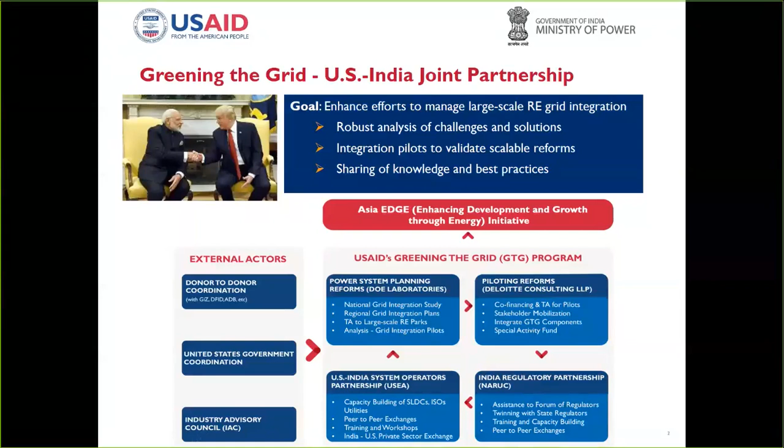In the last three years, the program has made some progress towards these issues. The program is piloting six innovation solutions and technologies, one of them being the flexible operation of coal-based power plants, and today we are going to discuss more on the findings of that particular pilot.

In addition, we also have pilots on battery energy storage systems, on automatic generation control on renewable energy plants as well as on hydro facilities. There's a pilot on market reforms, and another pilot on dynamic reactive power compensation. So there are around six pilots which are ongoing under the program.

There are also two white papers currently under development. Once completed, another one which focuses on electric vehicles is still to be implemented.

The program has already leveraged $12.44 million in terms of investments from partners such as NTPC or Power Grid Corporation, and so on and so forth. We have around 19 members on the Industry Advisory Council.

The program is also providing regulatory support to states, and 14 states have been supported thus far in terms of coming up with or drafting their forecasting and scheduling regulations, as well as DSM regulations. The program is also working with or supporting CERC in its market design.

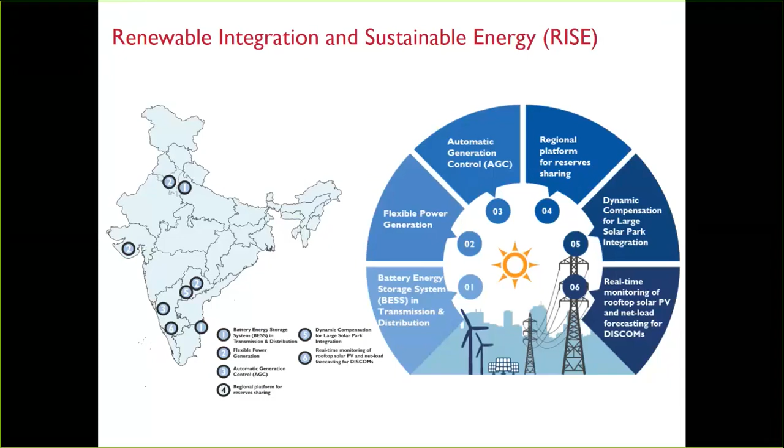And there is another pilot that we intend to look at, on real-time monitoring of rooftop solar. That's essentially distributed energy rooftop forecasting, still being discussed at the pilot stage, but the rest of the 5 pilots are in a well advanced stage of deployment. Now, I will quickly take you through what we are looking at in the coal-based flexible power generation with NTPC and GSECL.

We started this pilot way back in early 2017, and it's almost 3 years now.

If you look at this slide, there have been 4 stages, and we are in the 3rd stage of pilot implementation. We started initially with the techno-economic assessment, comprising technical due diligence and detailed feasibility assessment of 2 units of NTPC: one 200 megawatt unit at Ramagundam in Telangana, and a 500 megawatt unit at Jhajjar plant in Haryana.

The objective of carrying out the technical due diligence studies was to assess the existing state of operations of these units, how they have run over the past 10 years, what design components have been incorporated, what changes have been made to the OEM design, and how it will help in charting out the flexible roadmap for these units and similar 200 and 500 megawatt units in the country, especially for these two utilities.

That's where we had international support from our technical consultants, Intertek, who bring a lot of expertise based on their wide experience conducting similar studies worldwide. With their help, we were able to assess the damage cost modeling studies, and feasibility reports were presented to NTPC as well as GSECL. Similarly for GSECL, the generation utility in Gujarat, we conducted a similar study for 200 and 500 megawatt units at their Ukai thermal power station.

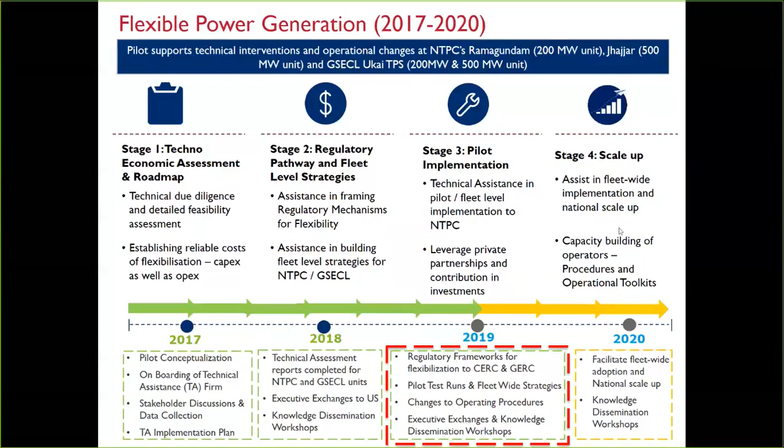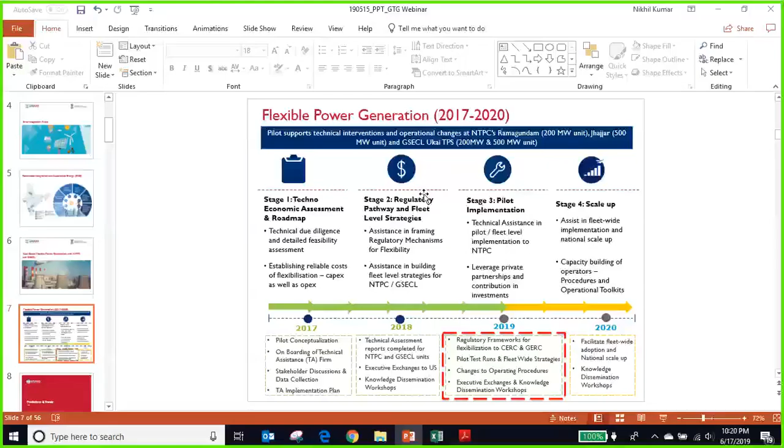Thank you, Anuj, Ripu, and Monali, and thank you to all the attendees for joining us. It's quite humbling to see what a small part we're playing in the big project. Let me quickly share my screen and we will get started. Anuj, if you could confirm that you can see my screen. Yes, I can. Okay.

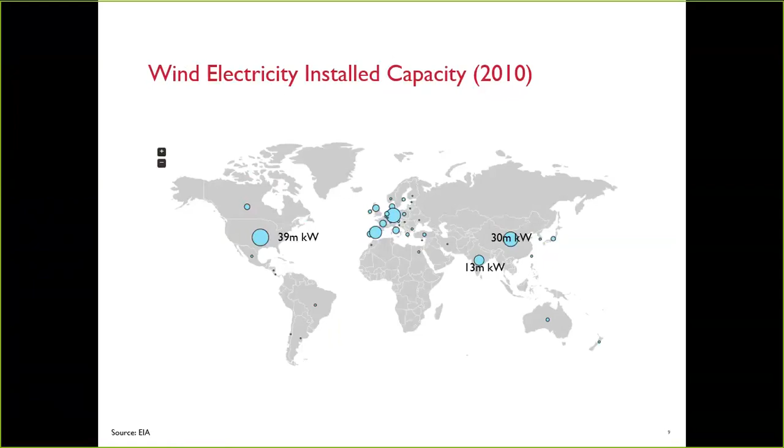If you're attending this webinar, you already know the trends. In 2010, just 9 years ago, we had some amount of wind capacity, predominantly in Europe, China, US, and India. But fast forward 6 years, and you can see what a big change in wind capacity there has been throughout the world.

Today we have 57 countries out of some 90-some with 100% renewable targets. Renewables dominate new capacity additions. In fact, in 2017, we had more PV capacity added than coal, gas, and nuclear combined worldwide. A bulk of that addition comes not in Europe or the US, but primarily in China and India.

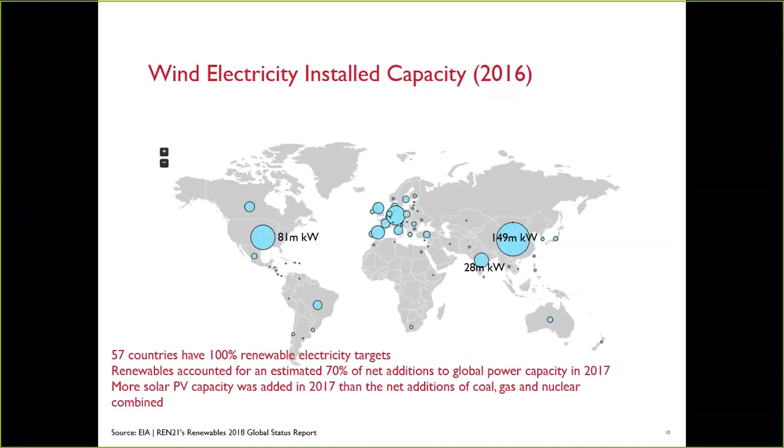In India, we went from 13 million kilowatts of wind capacity to 28 million kilowatts just in 6 years, and the targets are quite ambitious going forward.

Here are some of the predictions that Intertek has worked on with various other partners. We did studies with GE, as well as the PJM system operator, the Department of Energy, and the NREL lab in the US.

Typically what happens when you add renewables to the grid is that most of the fossil fleet, the conventional fleet, has to change its operating profile. Some of the scenarios and analysis we did in the past suggested that operating costs for conventional fossil plants would increase by 2 to 5% on average.

As markets have evolved, or if you're in a regulatory world, a 2 to 5% increase in operating costs can have a big impact on your revenues. So we think that's a big deal.

Also, if you have a coal-heavy or gas-heavy generating profile, as you add more renewables, they will displace the units on the margin or even units that are traditionally base-loaded. If you looked at the Western grid in the US, which is gas-dominated, as you added 4 megawatt hours of renewable generation, you displace 3 megawatt hours of gas from the grid. So not only do you have increasing O&M costs of 2 to 5%, you also have reduced revenue from not being able to generate.

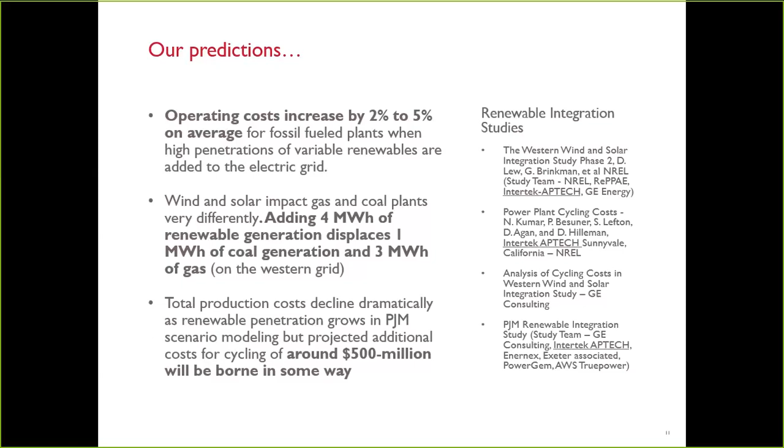As Anuj mentioned, one of the outputs of our analysis for the GTG program is to assess how capable the coal units in India, both at GSECL and NTPC, are to perform cyclic operation, as well as what the impact is in terms of financial, O&M, and reliability of the unit. If you cycle the unit today, what happens tomorrow as you have to spend more money on the units?

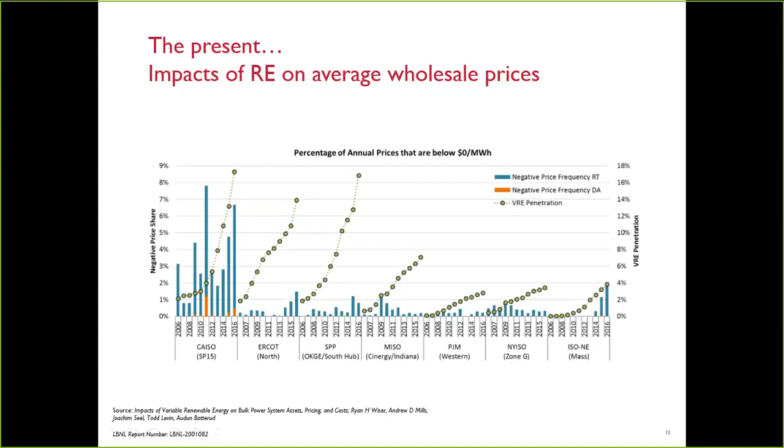One thing to point out is that it depends on which market you're in. If you're in California ISO, you can see as wind penetration goes up, the negative price share also goes up. But on the flip side, if you're in PJM or MISO, that frequency isn't as dominant. So there are certain regions affected more than others - I don't want to say that just because you add renewables, that would always be the result.

I can skip this since it's a US scenario, but something to point out is that if you look at the US, the capacity factor of coal units has gone from 60-61% in 2013-14 down to 54% in 2018, with gas being the dominant generation.

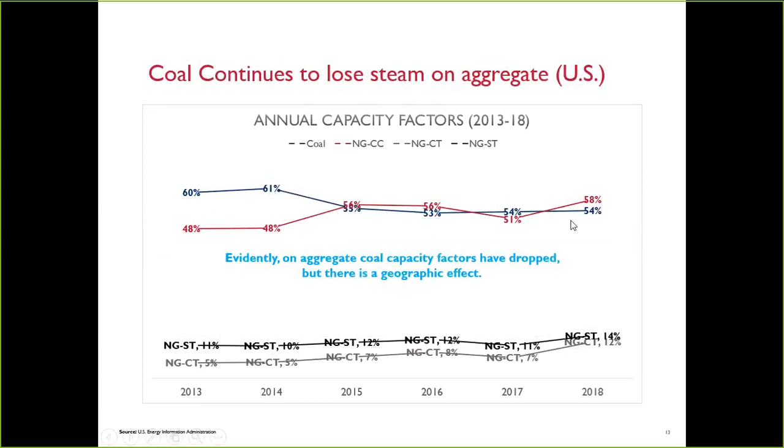Very quickly, we wanted to see how wind and solar impact conventional fleets. We looked at 3 different regions in the US: California, Texas, and Iowa. California is a solar-heavy state - they have wind, but solar is the dominant renewable generation technology, along with natural gas.

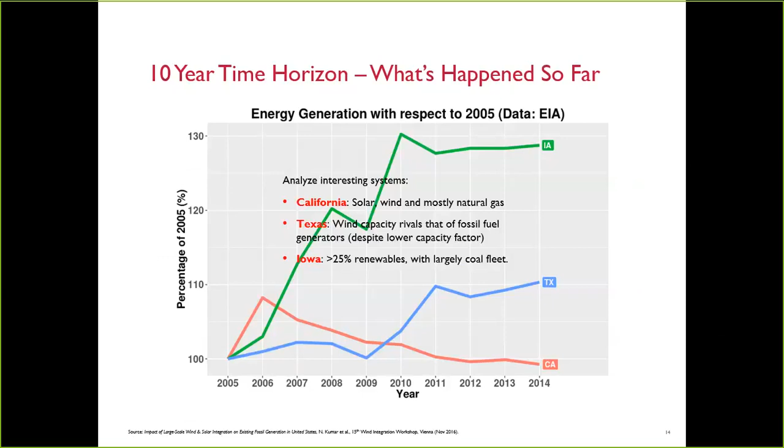Texas is the largest producer of wind in the US, and Iowa has over 25% renewables with a largely coal fleet, so Iowa should represent what is likely to happen in India. When you take a look at these 3 regions - I can skip this - here's what happens on the fossil fleet.

On the left-hand side, you're seeing the California fossil generation. What we have is offline hours, load following hours, base load operation, and over MCR—so if you're using duct firing on a combined cycle unit or something of that sort.

If you look at California, between 2005 and 2015 there was a significant increase in units staying offline. Also, these units operated at full load. Because it's a solar-heavy state, the requirement on the conventional fleet is less about low load operation and more about quick start—as the sun comes up, you want to shut down units quickly, and when the sun goes down, you want to turn them on quickly. You can see that's exactly what's happened in California.

If you look at the rightmost chart, Texas, which has a lot of wind, because you've got so much wind you have to turn off a lot of units—you can see an increase in offline hours. But other than that, wind has a little bit less of an impact in terms of cyclic on-off operation.

But if you look at Iowa, which is a coal-heavy state with a lot of wind, they have replaced the coal fleet, so you have a lot more offline hours on the fossil fleet. Also, in the baseload section, the number of hours on baseload have reduced. So not only are you not running a lot, you're also running at low loads, because you have a coal fleet which is not that flexible.

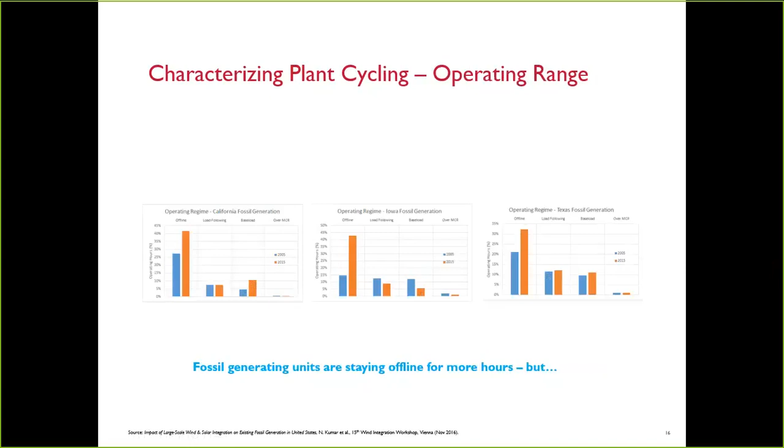On the left side is the classic California duck curve. As the solar comes on, you can see the ramping requirements on the fossil fleet. In Texas, you can see very little change over time. This is 24 hours on the x-axis and the amount of energy on the y-axis.

But in Iowa, the red line is 2012, the blue line is 2015. Throughout the 24 hours, the generation from the fossil fleet has reduced—wind is displacing the coal units.

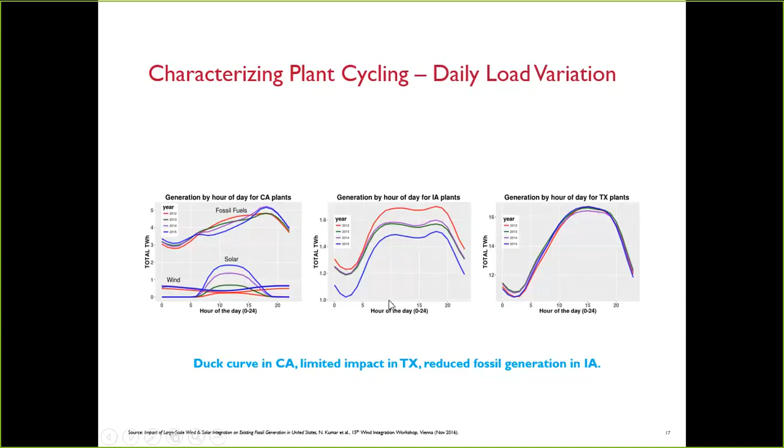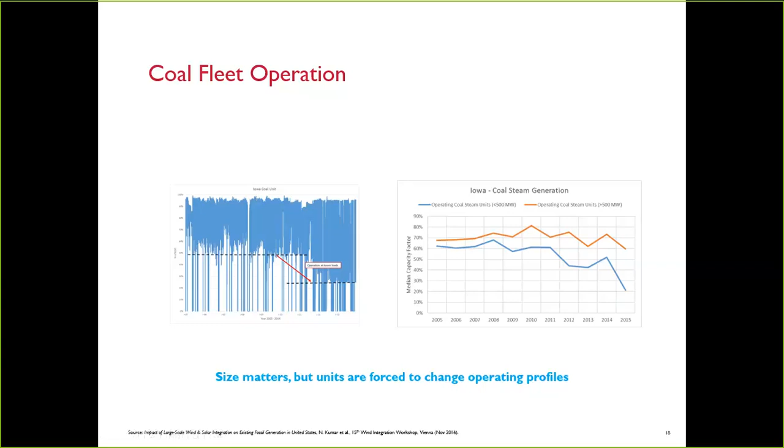When you look at coal units, there's a different scenario for a small versus a large coal unit. For a large coal unit, the orange line shows a slight reduction in capacity factor from 2005 through 2015. But for a smaller, less efficient coal unit, the impact is far more dramatic—going from 60% capacity factor down to 20%. So size matters for coal units in a renewable world.

Part of what Anuj was mentioning, and I'm hoping Mr. Sinha will add comments later, is that there are opportunities in this type of operation. If we have a regulatory process of cost recovery and you don't have flexible generation from the coal units, then the incentives are moot. You need system operators to be able to get flexibility from the grid.

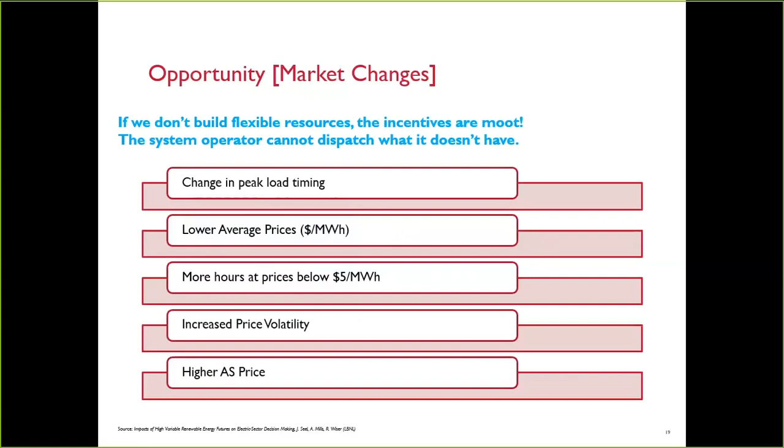Obviously you have price volatility and higher ancillary service prices. So if you're not flexible, you can't take advantage of some of these incentives that the market or the regulatory process is going to put in place. That's something you want to be able to do.

So here's the problem statement: if you're looking at flexibility, what is important? One is startup time. Another is how low can you operate the unit. Are there any local emissions requirements—you have to meet emissions compliance. And then what are the ramp rates when you're running at low load going to full load?

What does this impact? Number one is safety. We've had concerns pretty much worldwide that as you operate units in cyclic mode, there are catastrophic failures of equipment that you did not anticipate, because you're used to running base loads. So safety of personnel is paramount.

The equipment life is going to change, reliability is going to change, costs in terms of maintaining equipment are going to change, and the amount of money you can make in the market or a regulatory world is going to change. How do we address these impacts? One, you make operational adjustments. Two, you invest capital in the units. And three, you determine which of these factors is most valuable.

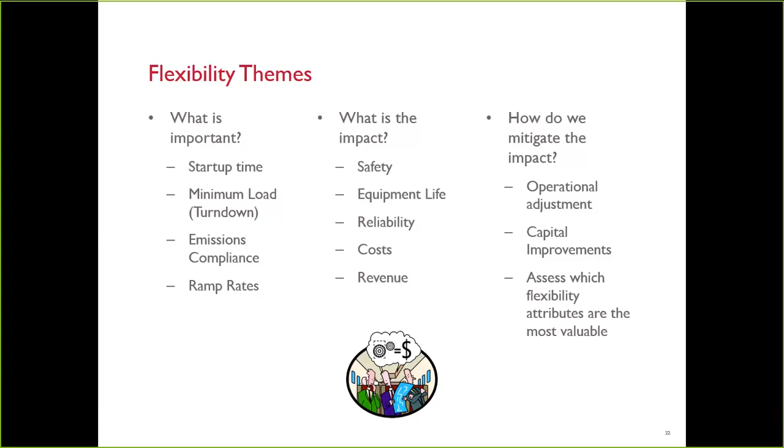Is faster startup time more valuable for you, or is minimum load what is valuable for you? You need to understand what is important for your grid strategy versus making your unit the ultimate flexible machine. That's not the point of doing a flexibility analysis.

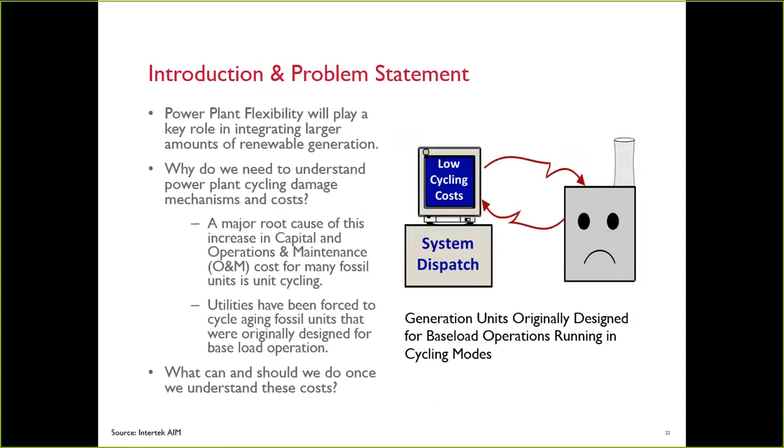In this case, the power plant has a sad face, not because it's being cycled, but because the dispatcher or the regulatory process is not accounting for the damage the unit is undergoing. If it can get compensated for the flexible operation, then maybe the plant's going to be relatively happy.

So the first statement I'd like to make is that almost any unit can be cycled. In fact, it can be cycled with minimal intervention. You can take an existing unit, a supercritical unit if you'd like, and change its operating mode. Now what that will do is you have to account for the increased wear and tear damage, both in terms of long-term penalties. As you cycle a unit over time, you will have more damage on the equipment and reduced reliability. But more in the short-term, you have heat rate issues and increased O&M and training requirements. So as far as you account for those aspects, you can cycle any unit.

There's also some training and education required around what kind of component damage exists on the unit. You need to understand, one, what is the current state of equipment damage on the unit. Just because you've run base load for several years doesn't mean you have no damage. You've actually consumed a fair amount of creep life on your superheater, on your reheater, some of the high energy piping, even your turbine. So there is some amount of damage already accumulated.

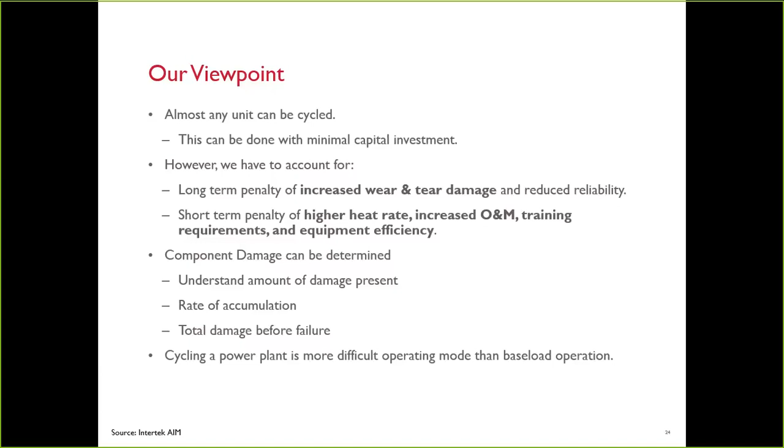The next thing you want to understand is what is the rate of accumulation. If you take a relatively new unit that has been cycled 50 or 60 times a year, that is very different from a unit that is run base load. So rate of accumulation is important. And then total damage prior to failure - how much total damage do you have on the unit? All of these things have to be taken into account, but again, all units can be cycled.

This is a very general definition of cycling. I know we've been using the words flexible generation and cycling for a while - I'm on slide 25. If you define cycling, we would define it both in terms of load following, mild load follows, all the way down to significant low load operations. So 55% low load, that is also cycling. And if you're just doing AGC of 5 or 10% change in operation from full load down to 85% load, that is also cycling.

And then you have the hot, warm, and cold start, which a lot of us are very familiar with. These offline hours are, for example - if you have a smaller coal unit, sometimes those definitions might be different; if you have a gas unit, those definitions might be different. But those are just examples. In general, the bigger the change in temperature on your equipment, the more the damage on the equipment. So cold starts are far more damaging than warm starts, which are more damaging than hot starts. And my colleague Doug Hilleman always says the trick to reducing damage is to keep hot things hot.

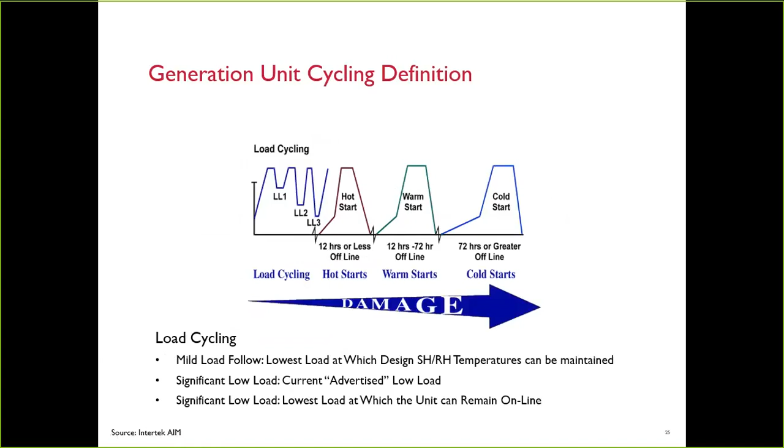So what is important is that if you're doing load following, the amount of damage you put on the unit is significantly lower, in fact magnitudes lower, than if you were starting and stopping the unit. To give you an example, you can probably do 50 or 100 extremely low load operations - not 55%, but 30% or 40%, depending on your coal quality and your burners and things like that. But units in the US can go down to 25% or even 10% low load, and that is still less damaging than a single hot start. So load following is the least damaging, cold starts being the most damaging.

If you're pressing baseload units into cyclic operation, these are some things to keep in mind. Number one is cycle chemistry. For the most part, when we went to India, there was on-site cycle chemistry personnel. They had good equipment, or at least had plans for good equipment. Having said that, in the multiple years the units had been running, some of the equipment was missing. So hopefully in the next few years, if you're performing flexible generation, you need a good chemistry program and good monitoring program to go with that.

If you have mixed metallurgy on the units, that is going to be a problem. So if you have copper in your condenser or your feed water heaters, and you're performing cyclic operation, that will be a problem in the future. So there are plans to get rid of that. Cycle chemistry is a critical component if you're performing cyclic operation.

The rest of it is mostly associated with thermal fatigue. You have thermally induced cyclic stresses. Again, if you do a cold start, that's the most amount of stress. If you're doing a load follow, less stress. There's extent of fatigue damage, and then nature and frequency of the transient. So you can do hundreds of load follows - that's one type of cycling - or you can do 10 cold starts, which is a whole different damage mechanism.

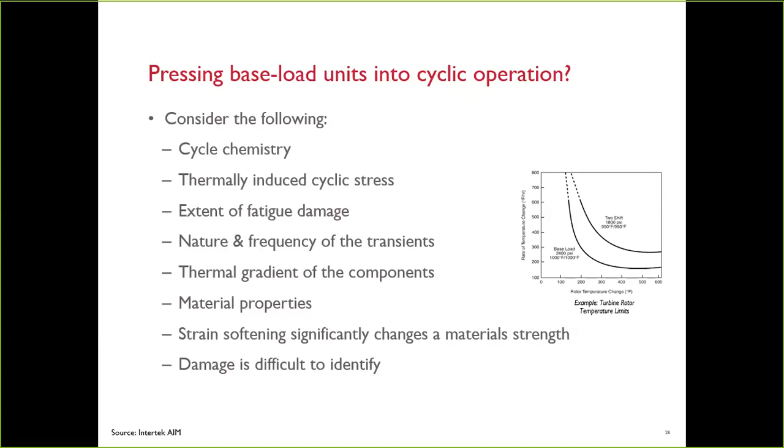So think about it: load following is actually lots of fast changes but small delta T. That is less damaging than if you're doing a cold start, which is a large delta T. But you can still do a small rate of change, and that can actually cause a lot more damage.

Just quickly, creep - creep is time dependent. If you're running a unit in base load operation, you've consumed creep life. Fatigue is just that - you're changing load constantly, on and off, or load following. And then there's a concept of creep fatigue interaction.

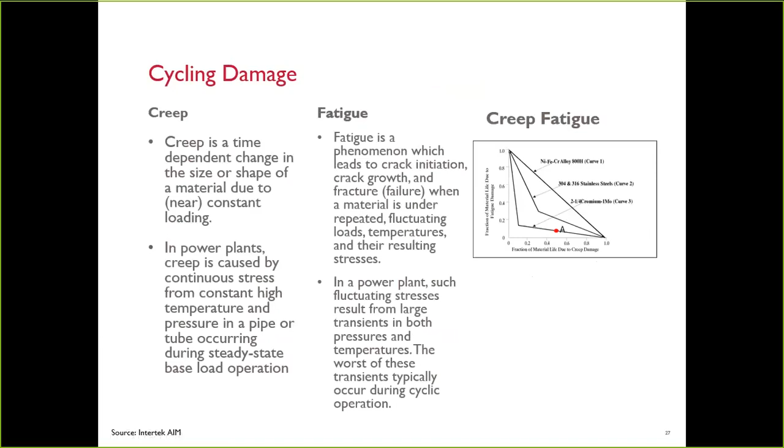So if you have a unit - I can show you this ASME curve on the right-hand side - what this curve says is that you have a nonlinear impact. If you have a much older unit, a 15-year or 20-year-old coal unit, and you add fatigue cycles to that, the rate of life reduction accelerates. That's basically what creep fatigue interaction would tell you.

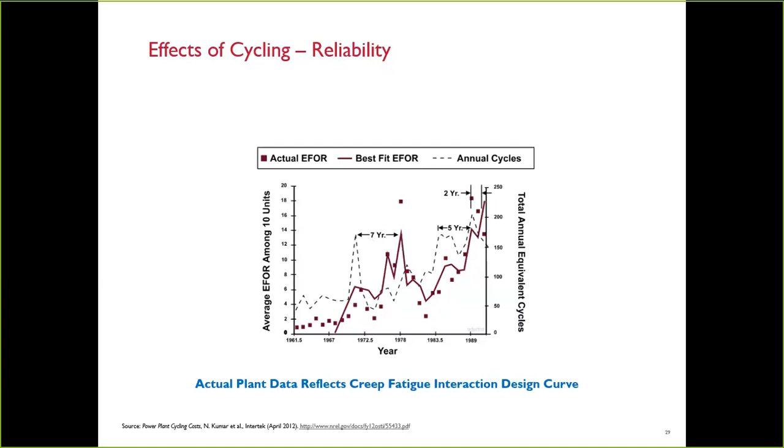Also, one thing to keep in mind is that there is always a time lag. Just because you cycle your units today or tomorrow doesn't mean that you'll have a failure next week. You can have it, there's a likelihood, but it's unlikely. Generally, there's a lot of time lag between increased cycling and then damage. So that's a point to make.

Effects of cycling on efficiency. So we all understand if you run a unit at low load, you're less efficient. At the same time, if you cycle a unit excessively, there's also a long-term impact on heat rates. So typically we say that you can attribute 1 to 5% loss in efficiency with cyclic operation. Now you can get all of this back if you do a good boiler overhaul or a turbine overhaul, and you can get some of this heat rate loss over time.

But if you're not on a base load unit, some of the units that we visited in India, there was quite a lot of time between turbine overhauls. So you will continuously lose efficiency over time until you perform one of these overhauls.

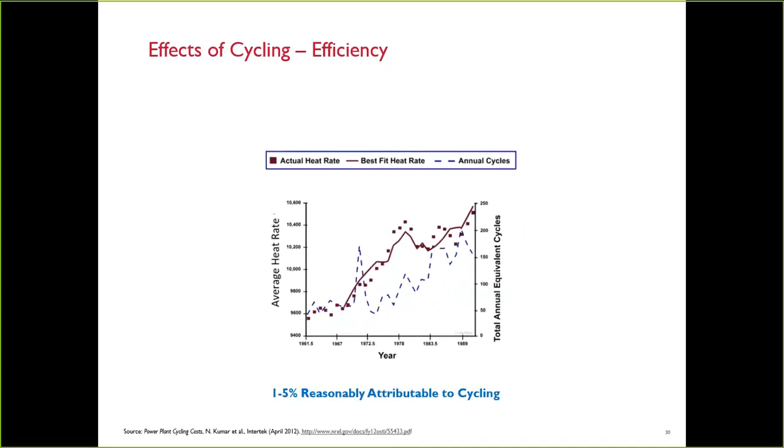There's also, even though I said that there's a time lag and that there is increased damage, there's also something to keep in mind which is the high impact, low probability event. So throughout history, we've seen this, is that as you cycle units, your likelihood, your probability of having a big outage goes up.

And the one that I want to point out, obviously, we've seen piping failures on the Mohave unit, the hot reheat line, or the Detroit Edison unit. But more recently at the Boardman station in 2013, this was a hot restart on the unit, and you had significant water hammer issue on the cold reheat piping on a hot restart. So you would not have seen this if you were running these units base loaded, because you don't do that type of operation very often.

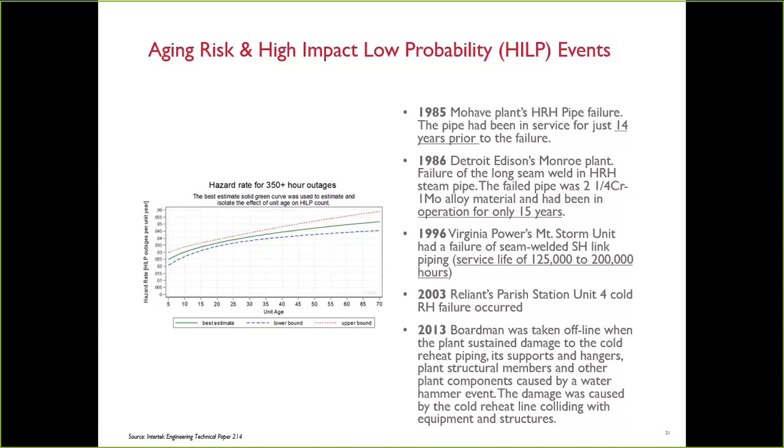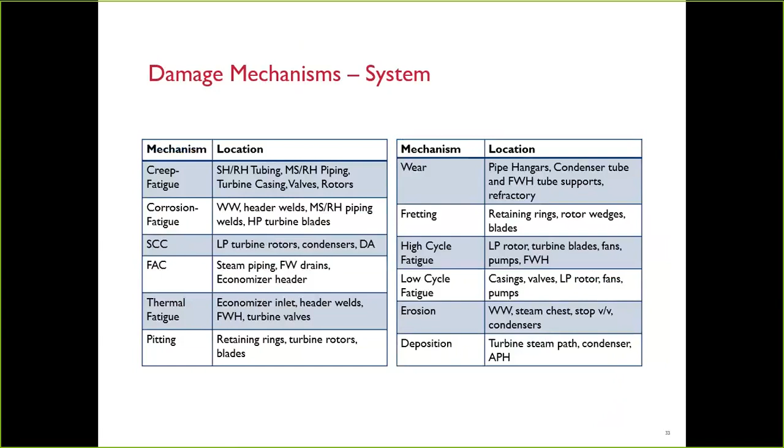So these are some of the risks associated with excessive cycling. So here's some damage mechanisms. I suppose you will get access to this slide deck, so you can take a look at this later on. And there are more mechanisms and locations. I don't need to go through each one of these. If you have specific questions, you can come back to this slide.

So I did mention that depending on the location or the equipment, you have different damage mechanisms. So if you're looking at cycling impacts on boilers, you have to look at boiler seal degradation, tube rubbing, hot spots, drum humping or bowing, and this can happen as you cycle units on and off. You can have furnace subcooling, you can have expansion joint failures, you can have superheater to reheater flexibility failures, DMWs, dissimilar metal welds I've already mentioned. You can have burner refractory failures.

That's one thing that we definitely look at when we're walking down a unit, that you want to look for refractory failures.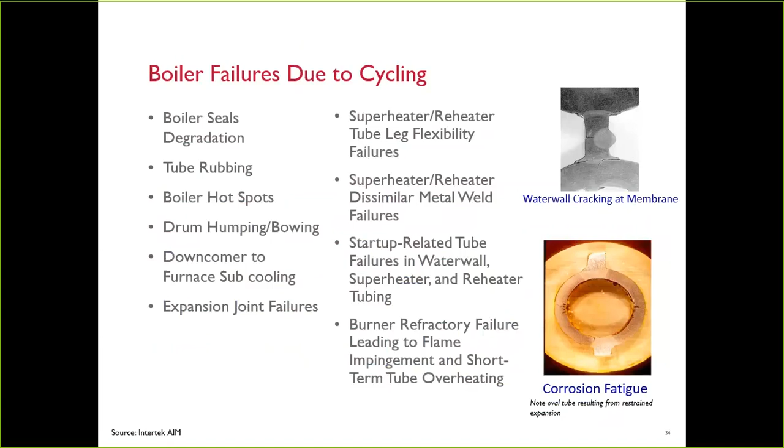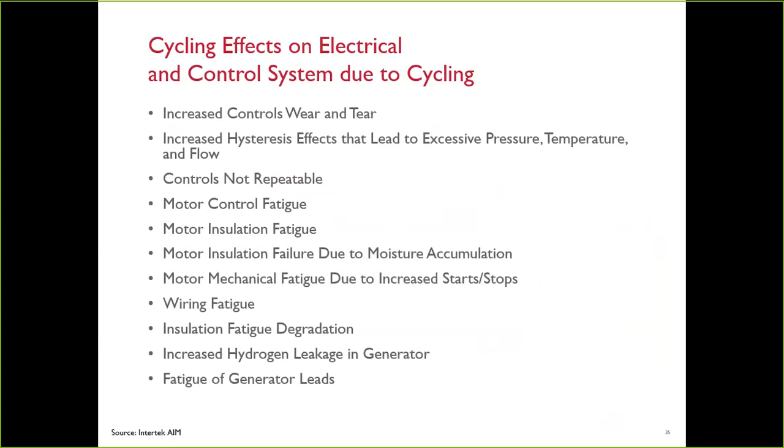Further down, in terms of electrical control systems, typically if you're running a unit base load, you don't quite see this, but with cycling operation, you do have more concerns with insulation fatigue, control fatigue, wiring fatigue, hydrogen leakage in the generator, fatigue of the generator leads, increased controls wear and tear. So one thing we've noticed is that sometimes, a $4 or $5 relay constantly fatigues, causes a forced outage that might cost you hundreds and thousands of dollars. So, even though, if you ran that unit base load, you wouldn't have that problem.

That's just an example of how cycling can impact even something like a control system failure. And not much is immune to additional cycling. If you look at turbine, you have to worry about steam chemistry, erosion, corrosion, last stage blade flutter. So we recommend a lot of units to consider sliding pressure operation for low load operation. But on the flip side, you have to worry about the Wilson line movement. That's another thing that you have to worry about.

So we mentioned water induction to the turbine. That's something to consider if you are looking at sliding pressure operation. You also have steam chest distortion, rotor stress increases. So there's a lot of possible concerns to look for if you're running these units in cyclic operation.

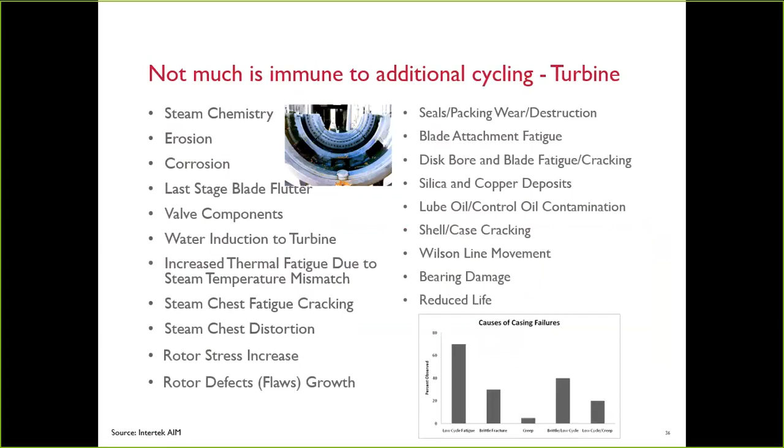So in terms of countermeasures, and this is something that we've been discussing with the units in India, if you look at this chart, what we have here is on the y-axis is forced outage rates, and x-axis is the number of cycles. So if you've designed the unit for cycling, and there are certain things that you can do if you're building a new unit, is that if you design a unit for cycling, increased cycling does not impact reliability as much as if you have a base load design unit.

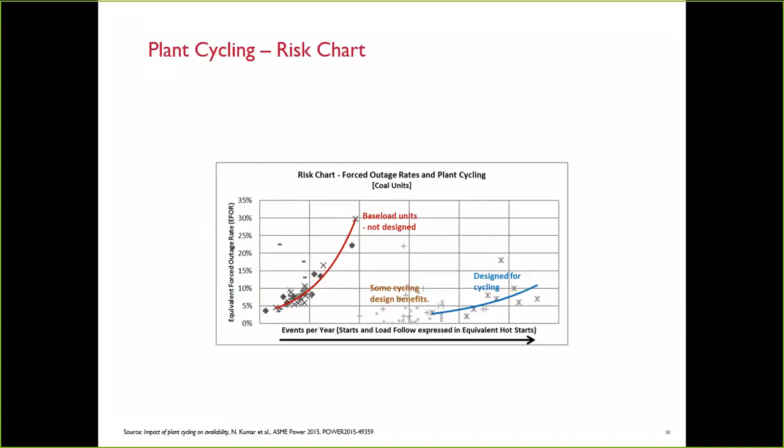So that's something to consider. But even small design components or countermeasures that you might include in your unit can have a much more dramatic effect. You can see the units in gray in the middle, where if you have certain design features, you don't have that same forced outage rate impact as you see on base load unit designs.

Here's a quick survey that was done a long time ago, and I think it's still fairly accurate. On the left is example improvements in minimum load after operational and capital retrofits have been included. Let's take an example of an 880 megawatt unit - you can see the minimum load was 40%, but it was brought down to 28%. That's on an 880 megawatt unit.

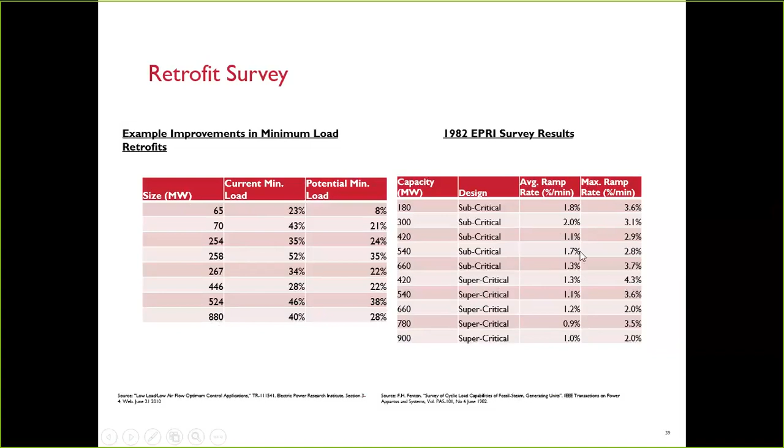But if you look at it in terms of ramp rates, you can see both in subcritical and supercritical machines, you can have significant improvements in ramp rates with operational and capital retrofits.

Now, in terms of cost-benefit analysis, you have to look at - and this is something I mentioned at the beginning - you need to determine what is important to you. You have to examine the aspect of flexibility that will result in the most production cost savings. Is it low load, or is it faster startup?

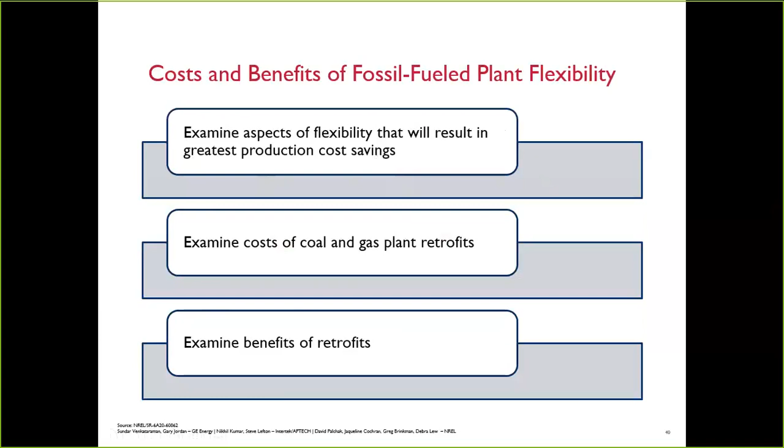So here are some examples of coal retrofits that can be considered. Obviously, the biggest bang for the buck, if you were to ask me if you only had one thing you could do on your unit, it would be controls and monitoring equipment. That would be the best investment from the beginning. The next best thing you would invest in, depending on your situation - flame stability is a big concern if you're running units at low load.

So, burner upgrades or burner modification. But even before that, you want to take a look at your dampers, your links, your expansion joints, and make sure everything is operational. You want to look at flame detection upgrades. You want to remove dissimilar metal welds. You want to install automated boiler valves. You want to look for corrosion fatigue.

And you can reach out to the Deloitte team or the GTG team, and we can send information regarding where and how to look for corrosion fatigue - both in terms of instrumentation as well as taking water wall samples for that. And then you want to look at variable speed drives. Obviously, in terms of chemistry, look at condensate polishing system.

And then, in turbine improvements, you want to look at shell heating blankets, water induction protection, and then turbine seals. So we've given you some cost to install, in millions of dollars, of various retrofit options, and you can take a look at some of these, both for small and large subcritical units as well as supercritical units, and then the expected benefit of doing any of these retrofit options.

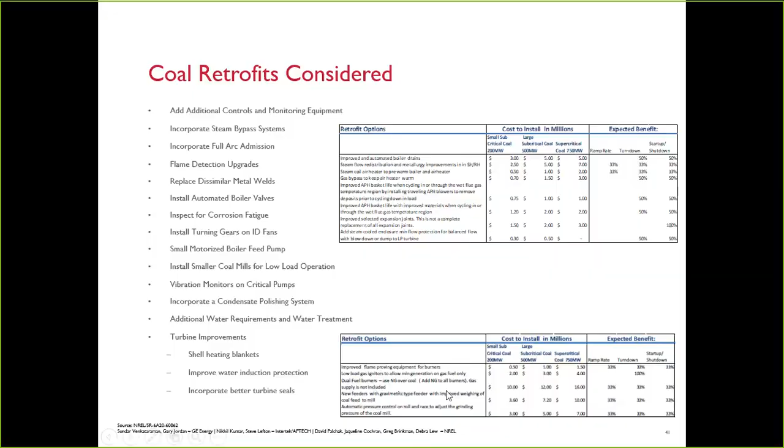And there's a lot of discussion here on gas igniters and dual fuel burners. Now, we understand there are some constraints depending on where you are, but there is enough information here. There's also a reference at the bottom which you can probably Google and download for more information.

I'll quickly touch upon - I have maybe 5 more minutes, or maybe a couple - but here's my point about any unit can be cycled. These are 480 megawatt subcritical coal units that did 2 starts a day, sometimes, but often - so when Anuj mentioned 2-shifting, these were units that were doing that.

Not only did they do 2-shifting, they were also able to do low load operation down to 90 megawatts net, and sometimes down to 60 megawatts for up to 6 hours. So, when we go on sites, people say we've done low load tests, and I always ask them, is the low load test for 30 minutes, 1 hour, or 6 hours? Because they're 3 different things.

So you can always run a unit down to minimum load for an hour or so, but then things start to change. So you want to prove out low load operation for up to 6 hours at least to see where your problem areas are. And this unit provided AGC control.

So with that type of operation - in 35 years, about 1,800 starts - it did have boiler tube failures, did have cracking in DMWs, did have turbine damage, had increased re-wedging frequency on the generator, and sometimes had forced outage rate up to 30%. So that is the impact of doing 2-shift operation on these units. Now, I'm not saying that if you did 2-shifting, that's what will happen.

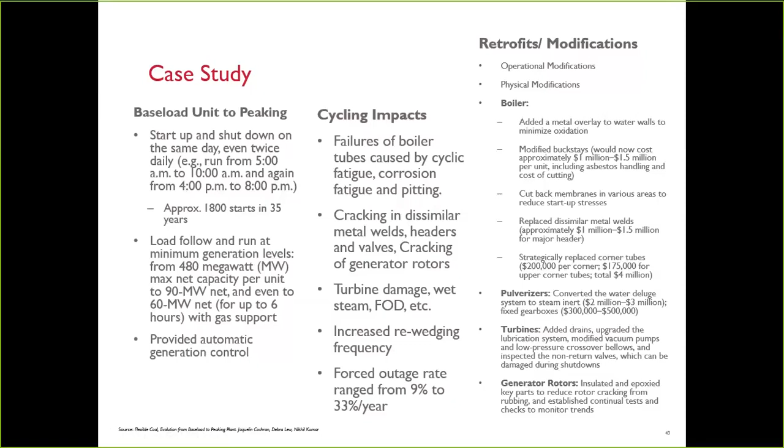In terms of turbine, they added drains, upgraded the lubrication system, modified the vacuum pump. There was a lot more things that they did on the turbine. We've seen a couple of really catastrophic failures on the non-return valve, so inspection of that during outages is critical. And then constant monitoring for the generator rotor as well.

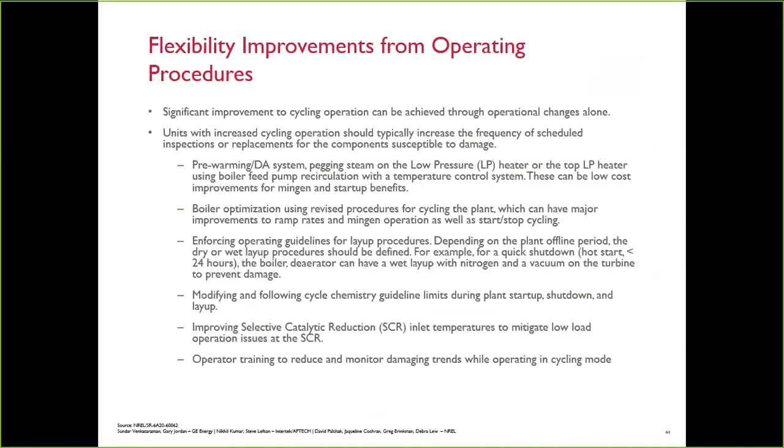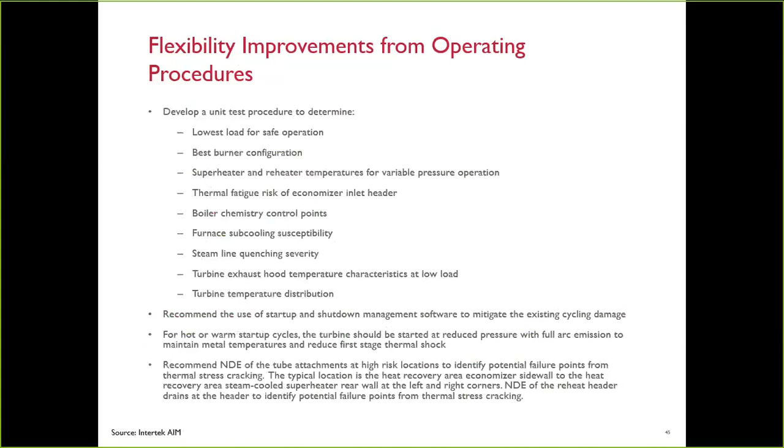Here's some more examples of what you can do for improving flexibility, and there's plenty. So if you're doing a low load test, you want to look at lowest safe operation, best burner configuration, look at variable pressure operation, look for thermal fatigue risk on the economizer inlet header, and you want to look at turbine exhaust hood temperature characteristics. There's a lot of things that I've listed here that hopefully you'll get access to in the slide.

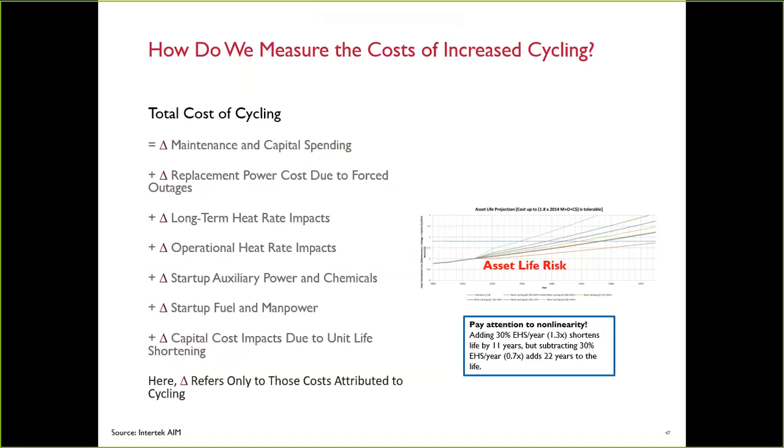The final thing that I'll spend a minute or two on is, so you have all this damage, so what? The number one thing you want to do is find out what it costs. To do that, if you're looking at the total cost of cycling, it includes the increase in maintenance and capital spending, the increase in forced outage costs, the long-term heat rate impacts, the operational heat rate impacts, the increased auxiliary power and chemical requirements, fuel and manpower costs, and the cost of life shortening. That's sort of the equation for the cost of cycling.

You want to make sure that you can utilize this cost of cycling, whether it is part of your budgeting, so you can prioritize spend not based on how you used to operate, but how you will operate in the future. You also need to give your system dispatch and planning this information so they can utilize this cost. They might have a market opportunity to cycle you and still make money, or if they understand what it costs and reduces life, they can make other decisions based on that.

Also in terms of plant operation, if you know your costs, your operators are going to be more careful about using excessive attemperation or force cooling the boiler. Those kinds of decisions would change based on what your cost of cycling is. Most importantly, the regulatory bodies will understand that forcing existing conventional units to perform two-shifting or low load operation is not free to do. You can have real consequences if you force all conventional units to perform excessive cycling—you can actually have reliability issues on the grid in the coming years if you don't compensate them.

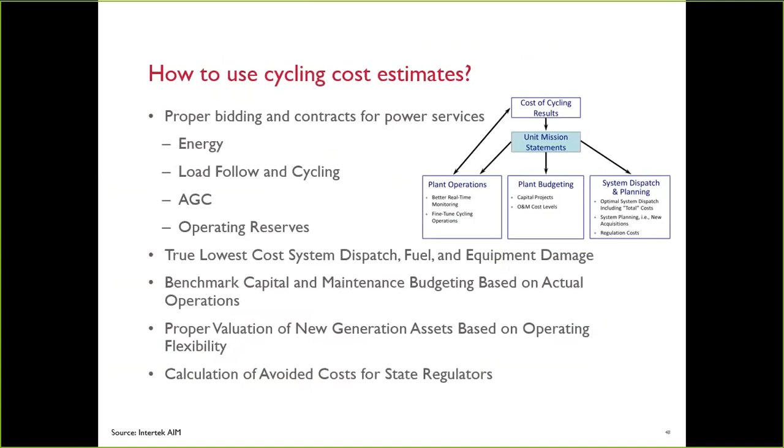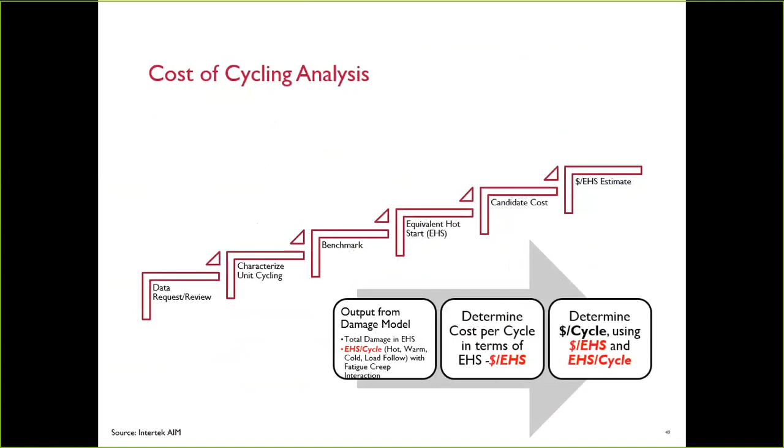So there's a lot more education and use of this cost of cycling information needed. Here's a typical flowchart of how we perform this analysis, something that we did for all four Indian units. We have a lot of these costs, and I'll mention that in the end, but each unit is a little different. In fact, when we did the studies in India, every unit had their unique circumstances.

So you have to look at past maintenance, equipment design and manufacture, vintage of technology, turbine design and pressure, the size of the unit, the age of the unit, time between outages, what frequency of overhauls you had, and what kind of redundancies you have—can you do 100% bypass, can you do 25% bypass? There's a lot of different configurations that a unit might have, and each of these things can play into the equation of what it costs to cycle the unit.

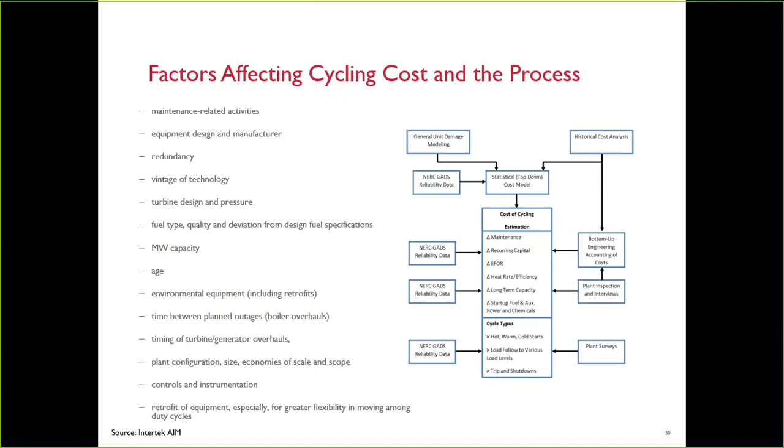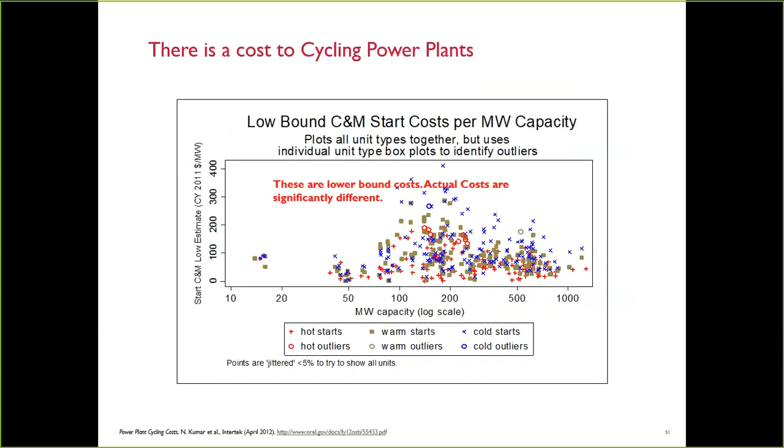We've got a link here with typical costs of cycling based on the size of the unit and the cost, but you can see there's a big scatter, and we saw the scatter even in the four units that we studied in India. Some units had bad luck with cycle chemistry, so even though not directly impacting the cycling operation of the unit, because they had bad chemistry, they were forced to shut down the unit more often than they should have. That causes a different type of cycling cost than if you were a 30-year-old unit that was running base load.

And so in conclusion, I'd like to say that you want to educate plant operations. You want to look at your startup and shutdown protocols, and determine whether force cooling is for economical reasons or to accommodate the maintenance staff. You want to avoid force cooling typically, and do more monitoring and inspection.

In terms of maintenance, because you're starting and stopping the unit more often, there's actually some opportunity to do some repairs while the unit's offline. But you also want to be smart about installing thermocouples and monitoring condensate accumulation.

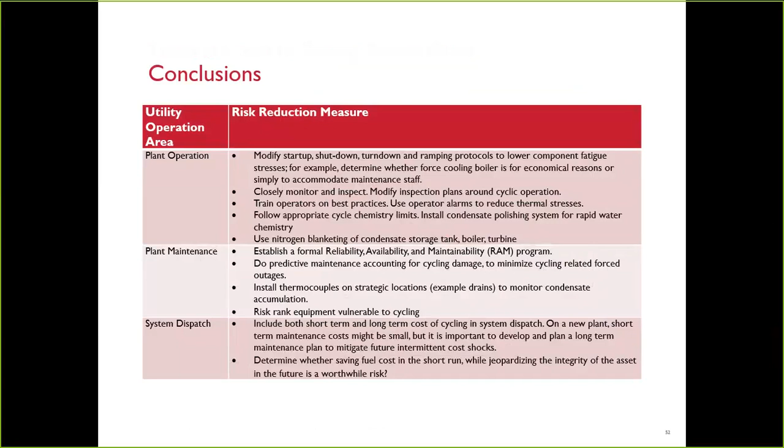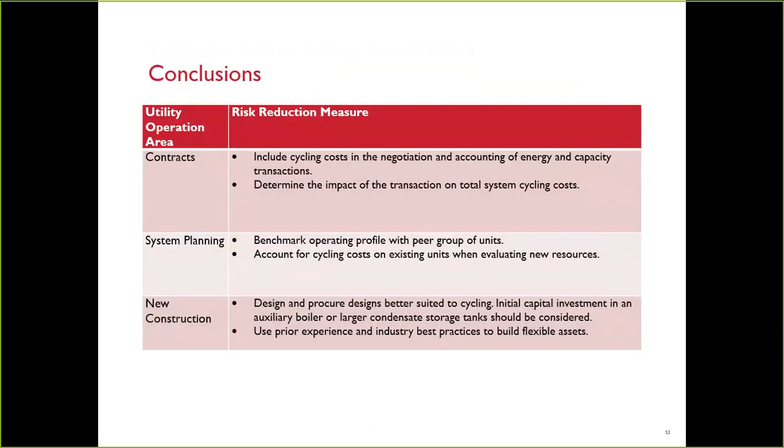Certainly, you want to inform system dispatch about what happens, renegotiate contracts. We've seen that happen in Europe, North America, and Australia, where if you have an existing power purchase agreement that has been renegotiated, if you're not running baseload like you did before. In terms of new construction, you want to keep in mind, do you want a baseload unit or a cycling unit, because that can have a big impact on how you design the unit.

One final thing I want to say is that some of the work that we've done has been taken much further along. So the GTG team, Anuj Ripu and Mr. Sinha from NTPC, have led some of the work that we've done and actually gone to the government of India and issued this report, and I'm sure they can share the links to this report. So of all the work that we did, it's actually having some real policy output from that. With that, I will take a pause and open it up to questions.

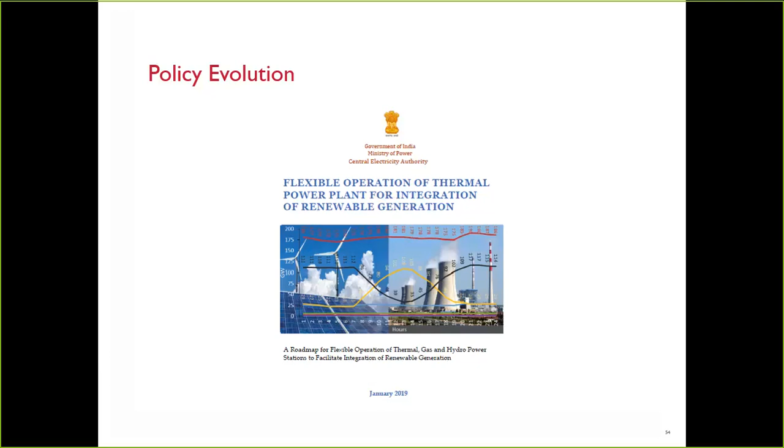There have been instances where states were required to back down due to increased RE penetration. We have specific examples from South. That's your next question: are existing plants cycling to absorb variable RE? Yes, they have started doing that, going below 50%.

In fact, some utilities, we have examples from Karnataka, have actually realized that those additional costs are not being reimbursed as of now, and that specifically creates a requirement to develop a framework for compensatory mechanism. This is precisely where we have submitted a regulatory note to CERC based on the damage cost modeling studies carried out with support from Intertek under this pilot.

Your next question is, are new plants in India being designed with a view of flexibility? So Sinha sir, would you like to take that up? Yeah, on the previous question, I'd like to add.

So the numbers we got, we accordingly presented to the CERC. There's a concept note that has been submitted to CERC, and that will complete the whole compensation mechanism.